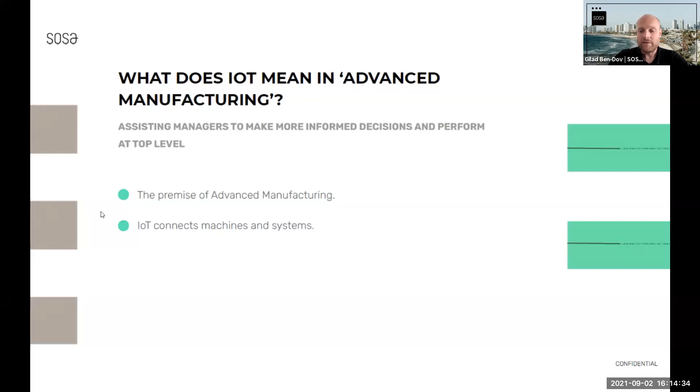Some examples that would be relevant for advanced manufacturing are sensors, RFID, all different ways to monitor and get a feel for the physical world via any type of machinery. The list of methods could really go on and on - it could be smart stores, smart cities, smart cars, healthcare, and so on. Then the application is broken down into what you can wear versus a smart home or vehicles, and so on.

In terms of IoT trends in the light of COVID-19, smart industrial plants, social distancing - all these effects are truly noticeable and make the requirements and demand for monitoring and all different technologies even more apparent. For example, with social distancing, it makes manufacturing, all the different industrial activities and logistic operations even more complex.

So with IoT, assets can be effectively monitored remotely. Automated machinery will continue with its work even in the absence of people. Relevant personnel can be alerted from a distance when intervention is needed. In terms of retail, you can have safer, more efficient stores or supermarkets - new innovative solutions for fully automated supermarkets and fulfillment centers, contact-free payments.

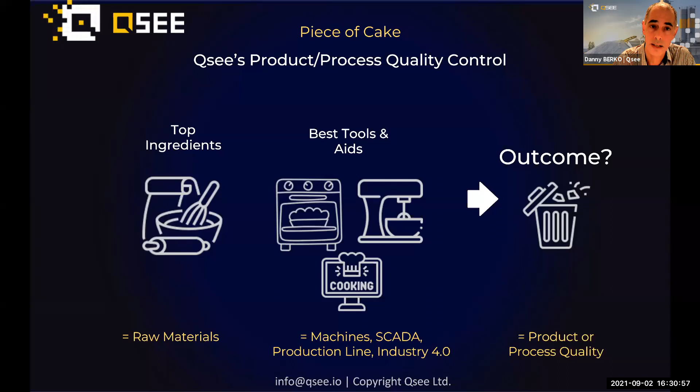We provide an alert very early in the production process, plus a prediction. In this example, hey, the cake is not going to turn according to your recipe, it's going to be defective. Most importantly, Qsee's unique value proposition is the prescription. It means the recommendation of what you need to do ahead of time during the process to make sure the outcome is satisfactory. In this case, the cake is going to turn perfect, a zero defective cake, such as please add 2 spoons of sugar, please speed up the mixture 10% faster, or please reduce the temperature by 2 degrees. This is called product or process quality control technology.

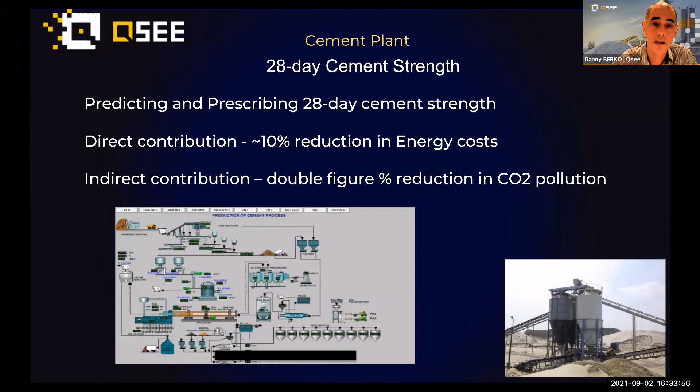By doing that, we improve productivity, but as importantly, we help reduce energy cost by 10%. More than 50% of cement product cost is contributed by energy cost, so saving 10% is a large contribution to the factory's operational savings. The indirect contribution is as important, because the building materials industry is responsible for more than 7% of global CO2 pollution, and this is the largest polluting sector in the world. So by reducing energy consumption, we are also reducing CO2 pollution and helping the plant and factory sustainability. Next slide, please.

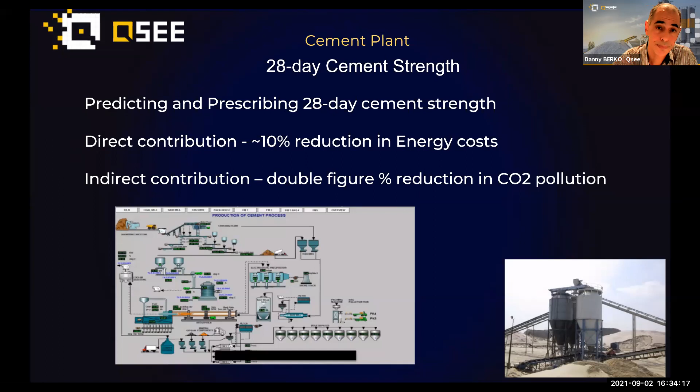Another example is from the chemical sector. In this example, it's a fertilizer factory, and here we help increase the yield, which means productivity is higher. We're able to help this customer increase yield by more than 15%. The indirect contribution is providing a stabilized production process: less downtimes, less disturbances, and better utilization of raw material. For example, you don't need to waste too much raw material to get the desired outcome.

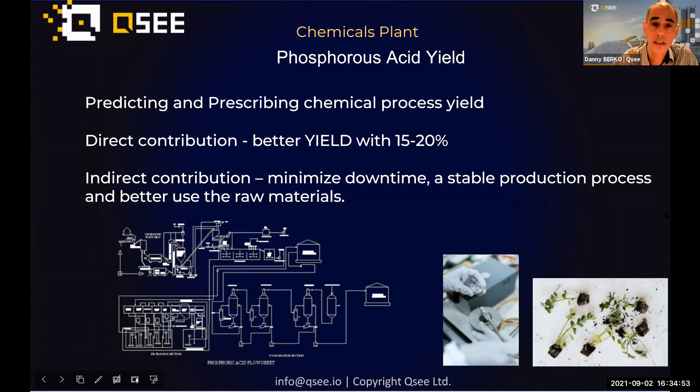Qsee serves continuous and batch process manufacturing, from building materials—I mentioned glass, metal, gypsum—to chemicals, which could be adhesives, paints, fertilizers, pharmaceutical substances, and so on. We are already serving those sectors in Europe and the Americas, and we are reaching out to expand our efforts into Japan. So we are looking for partners and end customers in the building materials and chemical sectors, and we would be delighted to communicate with you either directly or via the dedicated Israeli embassy in Tokyo. Next slide, please.

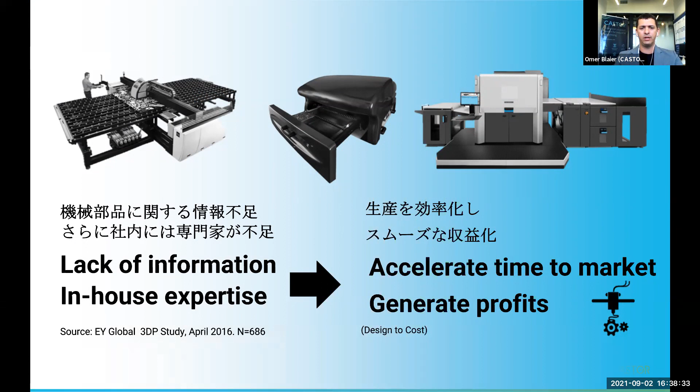This is where we come into the picture. We offer a decision support system for utilizing industrial 3D printing, which means we enable manufacturers to decide whether to prefer 3D printing over traditional manufacturing methods when it can save them time and money.

We do that by analyzing CAD files - computer-aided design 3D objects - technically and economically. Within that, we have three major technologies, shown in the next slide.

The first technology of Castor is analyzing thousands of parts at once. Companies can use Castor as a screening tool to upload the whole dashboard of a car, the whole interior of an airplane, or a whole inventory of spare parts, and very quickly, in seconds, understand whether there are opportunities to use 3D printing out of this full bill of material.

The second capability of Castor is the ability to combine multiple parts into one. The third capability is the ability to reduce weight, which is crucial for automotive, aerospace, and medical devices. We can provide hollowed parts which are strong enough, like a fully dense part, according to a simulation tool we have in additive manufacturing.

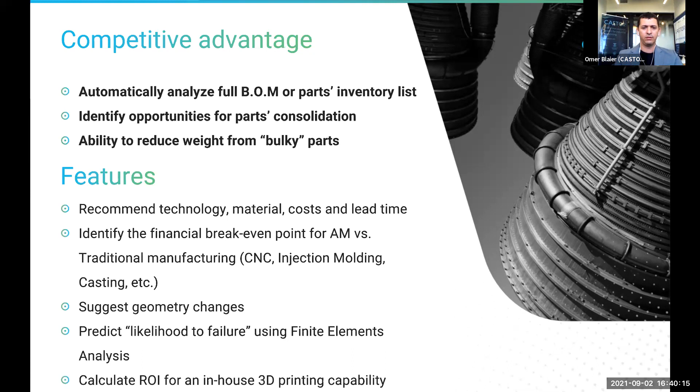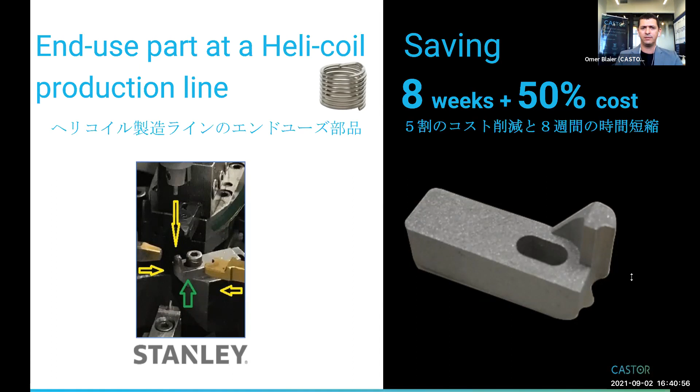Here is another example of how, as a combined part, three different parts saved HP Scitex about $65,000 a year, about $400 per such an assembly. It's part of our algorithm.

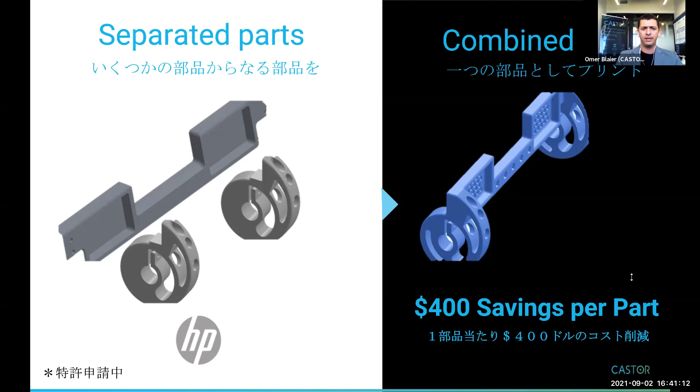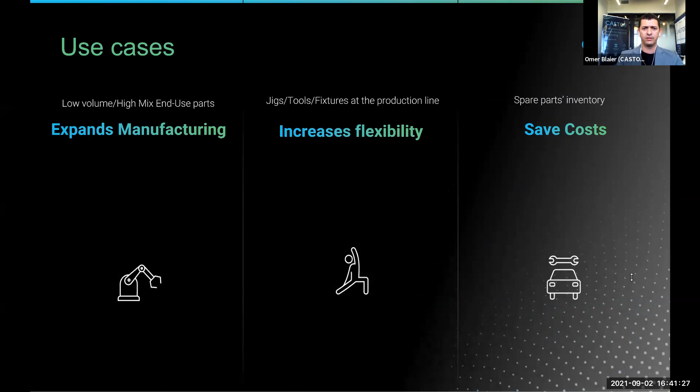These are the kind of things we do either for end-use parts, jigs, tools and fixtures in the production line itself, or for spare parts aftermarket services. We have three different products, shown in the next slide.

We believe that 3D printing is a driver of profitability. You need to identify those opportunities, and this is exactly what we do. We would love to contact you either at 3dcastor.com or at my email. Thank you again for the time and the opportunity.

Arigatou gozaimasu. This is it on my end.

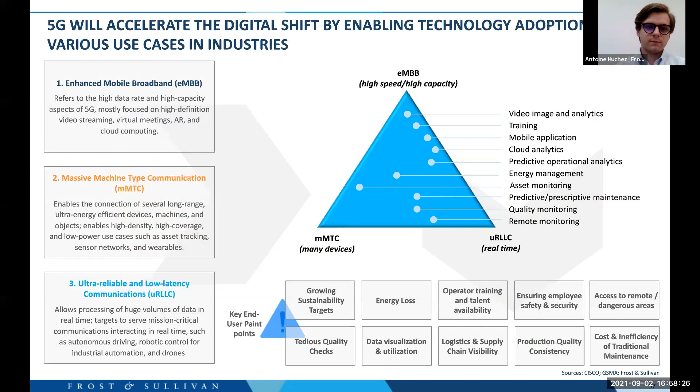On this slide, the idea is that when we think about connectivity in the industrial context, it has generally depended on network-based technologies such as Ethernet, fiber, and Wi-Fi. While these technologies have been able to enable IoT applications, these networks still regularly fail to solve key customer issues.

Communication incidents, for example, can have a big negative impact on business and operations, and at worst could even lead to fatal accidents. That's why more reliable and capable networks are required today.

We expect that the high availability and reliability of 5G networks will significantly enhance IoT applications and even enable new use cases. To give a concrete example, if you look at a process plant, a small fire or gas leak could quickly degenerate into a much bigger problem, like an explosion. Every second really counts.

This is why leveraging 5G with a sensor layer across assets and pipelines enables real-time data gathering and generation of alerts on any anomaly or deviation happening in real time. A plant manager with that data is empowered to make immediate action and solve any issues that arise.

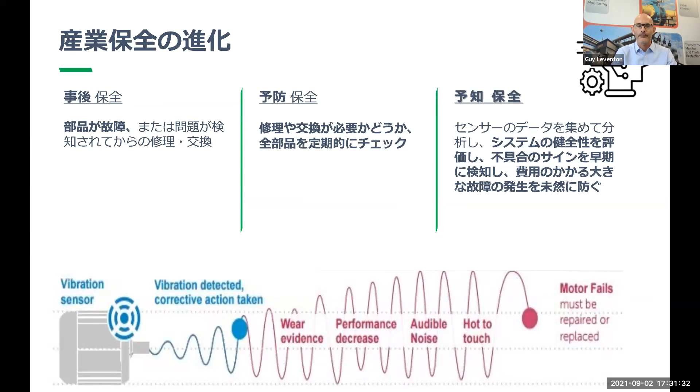Becksoft, in collaboration with other companies in Israel and Europe, harnessed our IoT platform to develop a predictive maintenance solution for the industrial market. We collect data in real time for ongoing monitoring, create alerts, and allow continuous monitoring of the system, while analyzing the same data to detect early signs of potential future problems. We also provide very specific recommendations of what the potential problem is and what the potential solution is, so companies can plan in advance. Our multidisciplinary solution provides continuous data collection for real-time monitoring and alerts, allows companies to remote operate the systems, and provides future analysis of upcoming issues.

Our solution, as we developed it, is very easy to install. Not yet, please go back one.

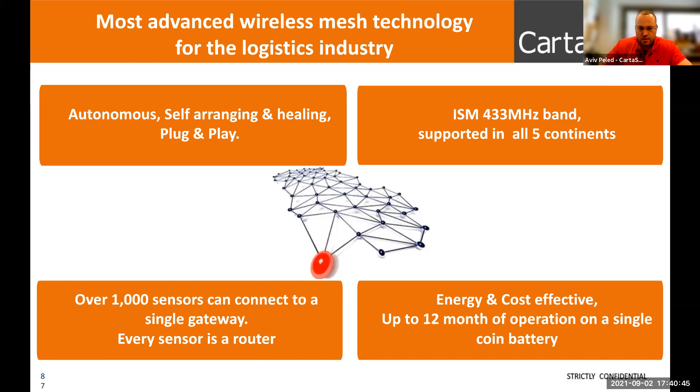Next slide, please. Okay, our sensors all have air approvals, in most of the air cargo companies, more than 40 of them right now.

Next slide, please. I'll do it very quick. Okay, you can skip this slide.

On the other side of the solution, the web application, we of course supply the reporting and alerting, but we also supply analytics with machine learning. Predictive maintenance is one of our main solutions to be added in the near future for facility cooling rooms.